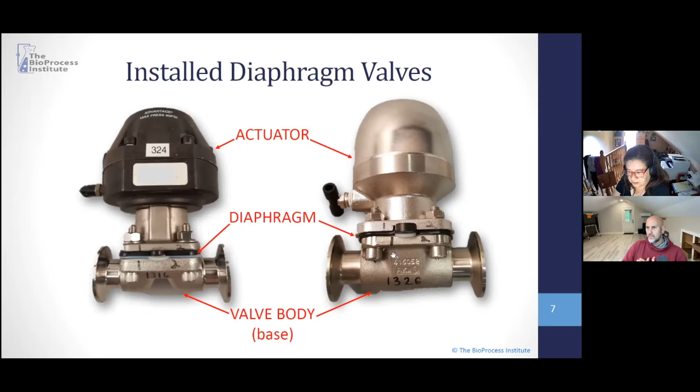So here again is that body, the gray thing here. This is the diaphragm, and here's the actuator. This actuator moves up and down. When it moves down, the diaphragm ends up against what we call the weir; these are called weir style diaphragms. So if you have fluid coming this way, this will come down and close it, and now the valve is closed. When the actuator moves up, it releases that pressure, and the fluid can go across the valve. So it's an on-off type valve.

And again, this is where your process is. Your process is touching the inside of that valve body, and it's touching the diaphragm, but it's not touching the actuator. And so this diaphragm has got two functions here.

It's closing and opening, so it's letting the flow through or stopping it, but it's also sealing here so that nothing would come in or out from the environment, of what is inside that piping system.

Okay, so for somebody that's listening right now, this is a difficult thing to put in your brain. So I would encourage, if you want to understand this a little bit better, to go either onto YouTube and watch this, or check out the notes on the show.

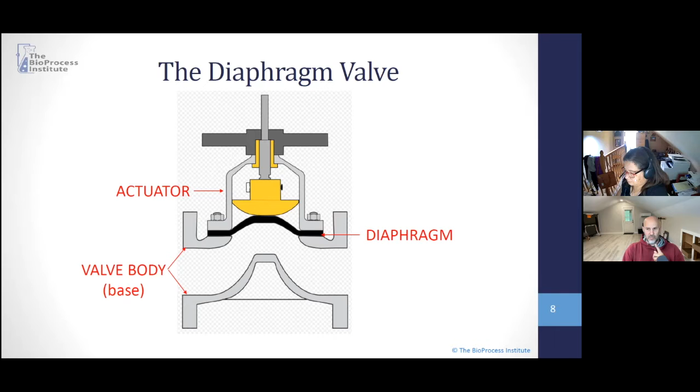So, all right, we'll back off of this visual for now. One of the things I'm curious about is, what are the things that the users are going to care about with these valves? Obviously they want to know that they work, right? They want them to either stop fluid or allow fluid, as the case may be. And I'm sure, as always with most things, how much something costs is always a big deal. Maybe how they fit into the facility, like a form factor - some might have a huge body, some might have a smaller body. So what are some of the other big things that a user is going to care about with these?

Well, obviously the first one is: do they work? That's definitely number one. And what do we mean by work? Does it close when I want it closed? Does it leak through the shell, or have things ripping out of the system? Those are the fundamentals.

The second one is more on the regulatory side. Does it have the right pedigree to be used in bioprocess? Are the materials of construction okay? Do they have the proper biocompatibility? So now we're not just talking about stainless steel, we're also talking about a polymer. That diaphragm is definitely not stainless steel, as we saw. It has to be flexible, so it's typically an elastomer — could be a thermoset or thermoplastic, materials like EPDM, PTFE, and others. Those have to have the proper biocompatibility to be okay to use in biopharma. Without that, you can't even put it in service. If you don't have that biocompatibility, USP Class VI for example, don't even look at it.

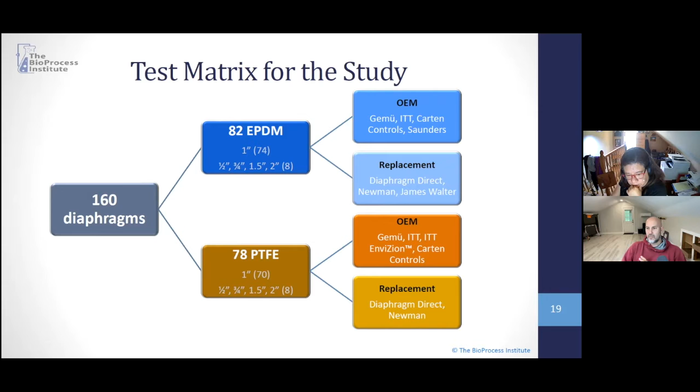So that's the test matrix, and then you had these different exposure conditions they were exposed to. The test is mostly based on ASME BPE Appendix K, which is steam cycling, and until recently was also combined SIP and CIP cycling. The cycles - how long, what temperature, what chemicals, what concentration - that's basically given by the appendix. But we based it that way, though we had some other milestones too.

So there were some valves we just tested to 100 SIPs and then looked at them. Some we went all the way to 500 SIPs. There are certain things you cannot be disassembling all the time to check, so you need to pick a few to test earlier on, because if you get to 500 SIPs and they're all done, you don't know when they failed. So we needed those in-between milestones to figure out where they failed - otherwise all I know is that by 500 it's all bad. That's why we have these different milestones - it gives you a bracket and a sanity check on the test, to make sure you're not wasting your time on a whole bunch of others.

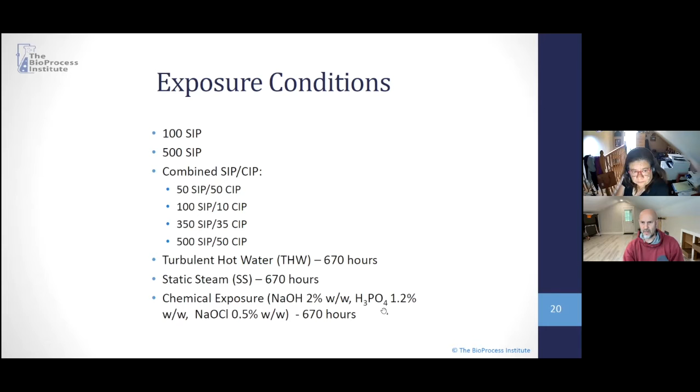Okay. And then we have finally a separate chemical exposure test, where rather than just looking at what happens with CIP cycles, we just look at: is the diaphragm going to dissolve if we put it into a caustic solution or phosphoric acid, and then they stay in there. This is actually according to an ASTM standard to check for chemical compatibility, and so that got us another set of results. Okay. All right. Well, it's a lot of different kinds of tests there to get some good information.

And now you have, this is like your racetrack slide. Right, exactly. So if you think of a racetrack, that's what we do with these valves. They go into our little SIP skid, and then they are continuously exposed to the cycles. And then we have certain milestones that are like the pit stops, right? Where, okay, we're going to take some of them and see how they're doing. Some may continue. Some, if we want to disassemble and do every possible analysis, that may be just where they stop. So we started with 160 diaphragms here.

We had 11 that we did 50 SIP cycles, 50 CIP cycles. Then we had 40 that we got to 100 SIPs. And then we continue all the way. The majority were tested all the way to the 500 SIP cycles. And besides, we have the ones that had the chemical exposure or the hot water exposure, steam exposure. And at the end, we had 156 diaphragms. So there were 4 that didn't even make it through the get-go.

Okay. So that's the difference. You install it, you put that diaphragm and everything, and it didn't seal from the very beginning. So there's no point in continuing the test at that point. Mm-hmm. So it can be another drop here, right at the start of the race, and basically you're just pulling off to the pit stop as they go. Yeah. Right. And you're like, hey, you're done racing. I got to change your tires and check on you.

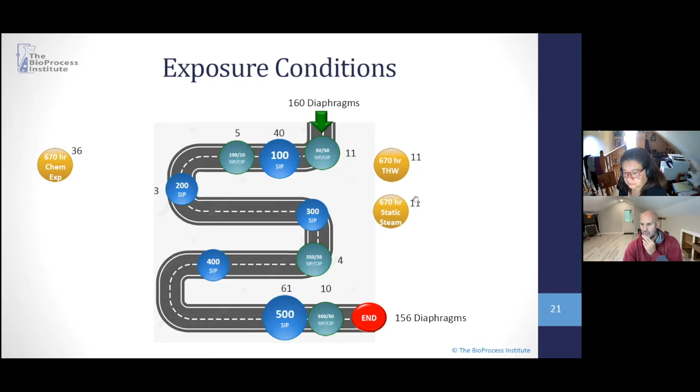Number one is sealability, and do we have pneumatic integrity? So that means that seal, what the valve is closing, that's what we call the seat, the weir. So can we actually close it, and then we don't see any liquid coming downstream, or air in this case, because it's a pneumatic test that is zipping through.

Yep. And those integrity tests can be done with air, or they can be done with water. So that's the first thing. This is what we call, if you fail any of these, you don't have the basics at that point. So this is the does it work question. Right. So if your actuator isn't working correctly, independent of your diaphragm, there's a pretty good chance it's not going to be closing or opening the way it needs to, right?

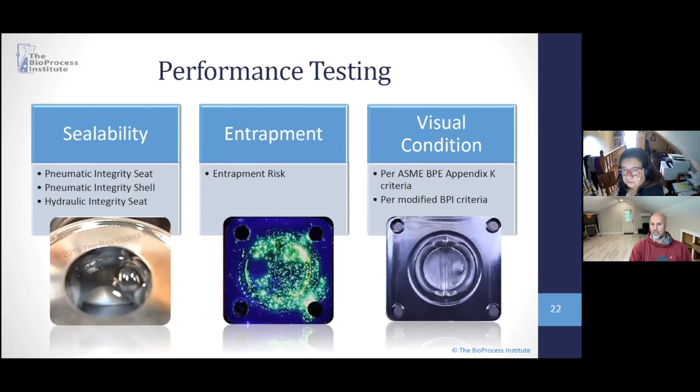All right, awesome. So I think there was one more that I wanted to see. What's your next one here? This one. All right. So sealability is important. Is sealability more important than one of the other things? So how do you actually weight that stuff to determine a score for these guys, right? Right, exactly. So there were two things that we did.

Originally, what we created was kind of a scorecard for each diaphragm, so that then you can compare scores. So then somebody's going to end up with a better score than the other guy, and that's how you would determine, okay, these guys are probably better. And then we also did an analysis that was just based on failure rates.

But on this one, which is with the purpose of comparing different manufacturers, we gave some weight to those potential failures, saying that integrity is by far the most important thing. The seat, pneumatic seat, pneumatic shell, and hydraulic seat integrity. The scores in there, okay, does it work, right? Definitely. The valve's not leaking. So we gave that a lot more weight than the other things.

Even entrapment, we gave it significant weight, but entrapment, when we looked at the data, there's going to be some trends on how that is also related to shell integrity. Right. So it's not just one or the other. Yeah. Everybody that has shell integrity has entrapment. But not everybody that has entrapment has shell integrity. So sometimes you don't see it. And then the visual, we gave it a certain percentage as well.

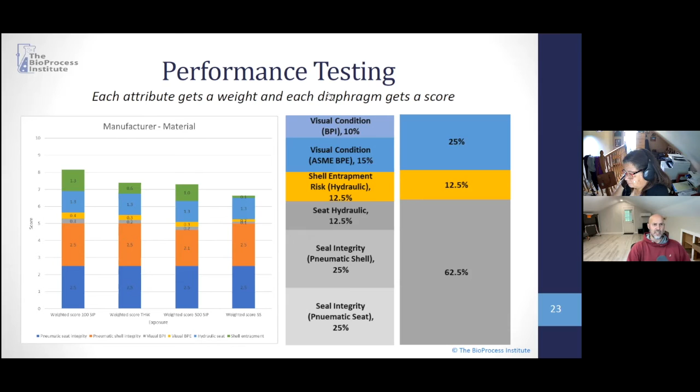All right. Awesome. That's really good. So this is how you get your Consumer Reports, the red circle with the little white dot, or the half black circle that Consumer Reports does. This is the BioProcess Institute version of these things. So that's correct. So this is how you did it.

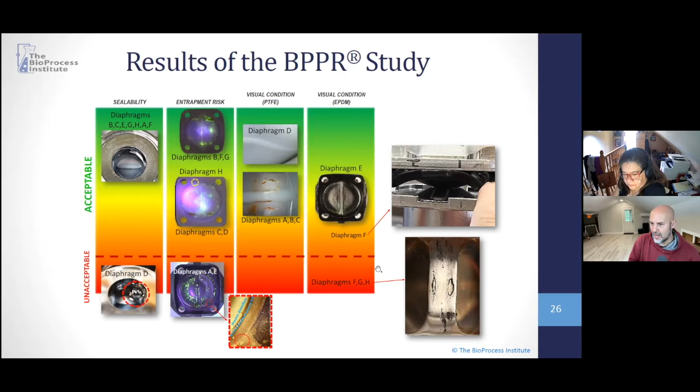Yeah. So again, if you're listening to this, we just got basically a bar graph kind of visual of these different categories: sealability, entrapment, and then the visual condition, from the low end of red and unacceptable up to the green, and you get quite a bit of variety there. And then you have more of the, you know, what's this next one?

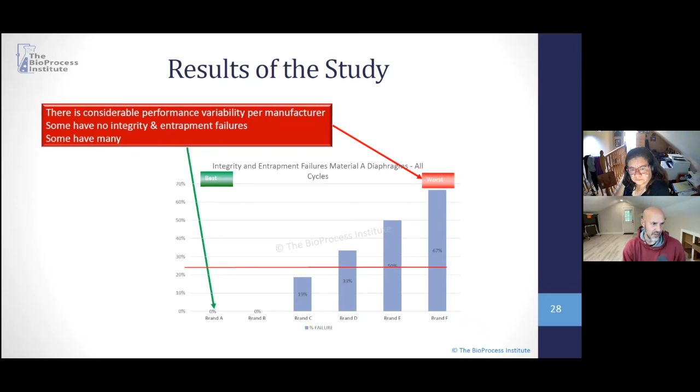So when you used, I'm struggling here with the word for whatever reason, you know, the replacement parts, did you put those into one of the name brand valve bodies? Yes, that's correct. That's how you did it. They go into a specific valve, whether it's an ITT or GEMU or Saunders. That's what they're intended for. Yes. Okay. So what we call replacement diaphragms, they don't make the valve; they just make the diaphragms. Right. Okay. Was there another one that went with this? I think that was it.

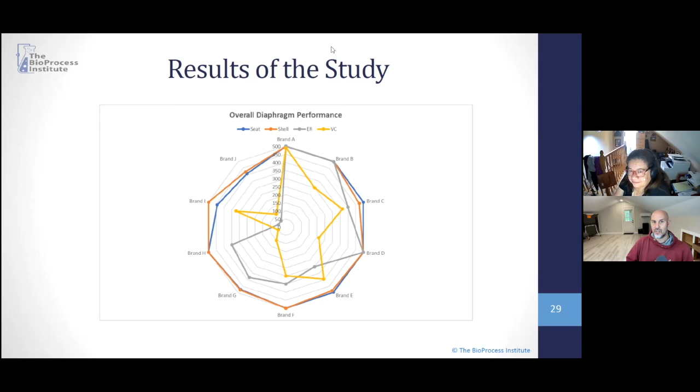So that's something that somebody could reach out to you and buy from you. What are some of the other ways you help manufacturers with this information? It sounds like we should all just buy brand A, right? But it's not that simple, it's not that easy. So what are some of the things that you do with manufacturers to help them with the stuff that you've learned?

As we were mentioning in the beginning, half of our clients are actually end users and the other half are manufacturers. We've helped manufacturers identify what was the weak link in their design. Where are they failing? Is it on the entrapment, or is it on something else, or everything is great but the visual condition, the EPDM is sticking to the metal or something like that? Once that's identified, then they know what direction they have to focus their efforts in, and also get some comparison to how the other guys are performing.

Obviously nobody has the perfect valve. There's always going to be an application where one valve is better than the other, and nobody has the perfect material. So it's all in comparison to what else is out there. The report can be used in those two situations. For a manufacturer, you want to find out where you're standing and what your weaknesses are, so you can improve on that. And for the end users, certainly to know what it is that I want to buy so that it's going to work, and how often do I have to replace it.